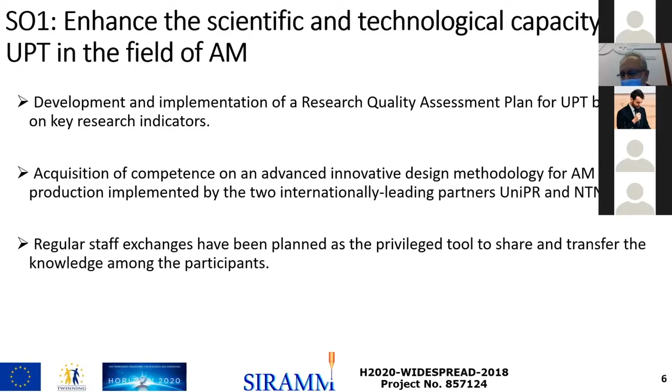We have to do some regular staff exchanges. I will show you a map of the exchanges. Unfortunately, we were not able to do it because of the pandemic crisis, but we hope to start this year to have all these activities done.

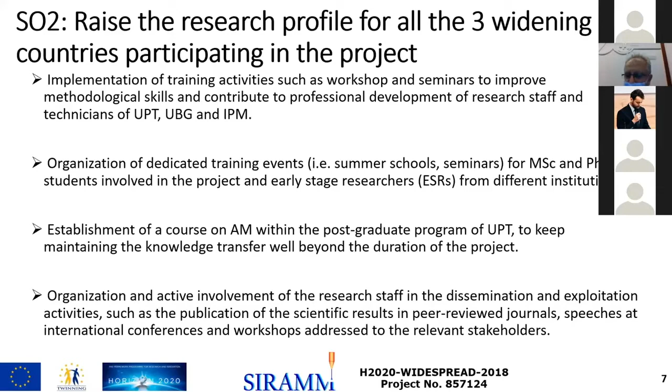What we also plan is to establish a course in additive manufacturing for our postgraduate students. This was planned for the last year of the project. However, because last year we had the accreditation of our master program, we inserted this in order to be advised by our quality assurance. And this course starts earlier, from this semester, and will continue in the following years. A similar approach will be applied at the University of Belgrade. So they plan to introduce an additive manufacturing course to postgraduate students.

So we want to spread the acquired knowledge among different stakeholders. We invited in the project, and we have had the support since we applied for the project, of the Continental company from Romania. We have also the Vitesco company with us. We will have a presentation in the afternoon from the company part, the industry part of the stakeholders. We have also different communication and dissemination activities to be done. We have a Facebook page, a Twitter page, a LinkedIn account and a ResearchGate account.

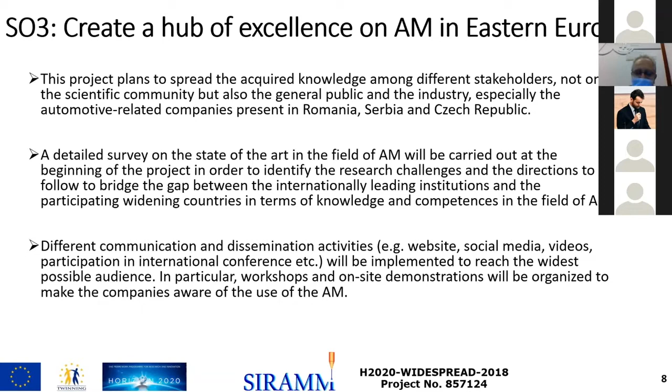So anyway, for such a project, we need to start from some scientific ideas, and we start from the fact that additive manufacturing technology is very attractive nowadays, and many industries try to use it in order to speed up their production process. The advantage is that you can obtain very complex shapes and parts with quite high precision and characteristics. The good thing is that you can apply this technique with different manufacturing technologies. You can apply it for polymers, and the most used is PLA, polylactic acid, but also ABS, polyamide, and additive manufacturing is also used for metals, steels, titanium alloys, and also for ceramics like alumina and zirconia.

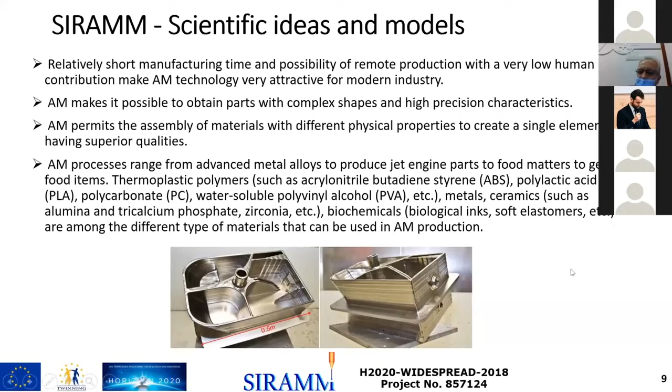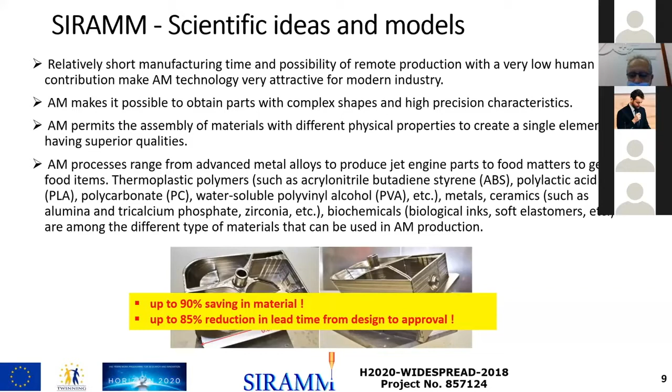So the advantage is that you have a broad range of materials which can be used in additive manufacturing, and you can print very complex shapes. You have 90% saving of material compared with the classical manufacturing technologies, and a reduction of the lead time from design to approval by 85%.

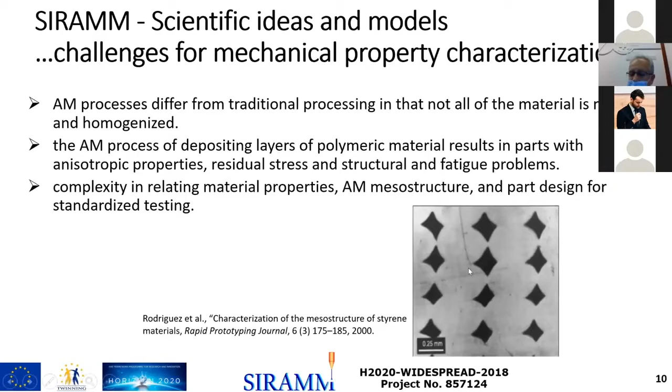However, there are some challenges because the additive manufacturing process differs from traditional processing. Not all the material in additive manufacturing is melted and homogenized at the same time. So we have layer by layer deposition, and this can produce anisotropic properties of the components that are obtained, also residual stresses and some structural and fatigue problems. So our project addresses this, the integrity and reliability of such materials. Also we have a non-homogeneous and incomplete infill. Even if we use 100% infill, you can obtain a shape which is not completely filled.

So some drawbacks of these techniques: low surface quality of additive manufacturing, basically in polymeric materials, but also for metallic parts, quite high porosity, quite high scatter in results if you try to test them or to measure the dimensions of the obtained parts, dispersion of data, variability of lifetimes. In some cases, the durability or the fatigue strength of the components obtained by additive manufacturing is very low compared with the other techniques, up to 10–20%.

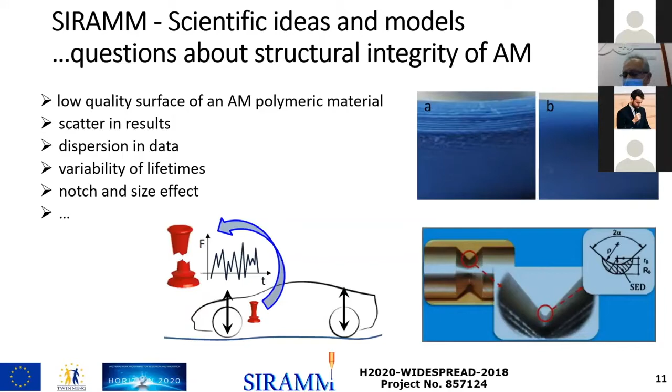And also what we want to address is the notch and size effect on these additive manufacturing components. And here we will have a transfer of knowledge from Norway, where Professor Berto is one of the world experts in notch and size effect, using different approaches like strain energy density, and probably he will show us these approaches Thursday morning.

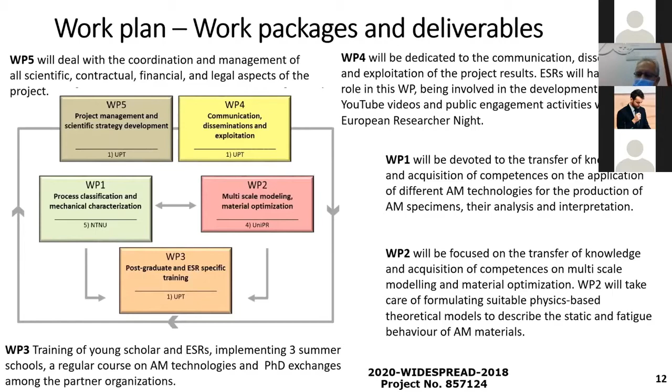So for this project we have 5 work packages. The first one, coordinated by NTNU in Trondheim, is process classification and mechanical characterization. We have the modeling part, multi-scale modeling and material optimization, the work package coordinated by the University of Parma. And the others, which are postgraduate and early stage researcher specific training, communication, dissemination and exploitation, and project management and scientific strategy development, are coordinated by University Politehnica, by the coordinator of the project.

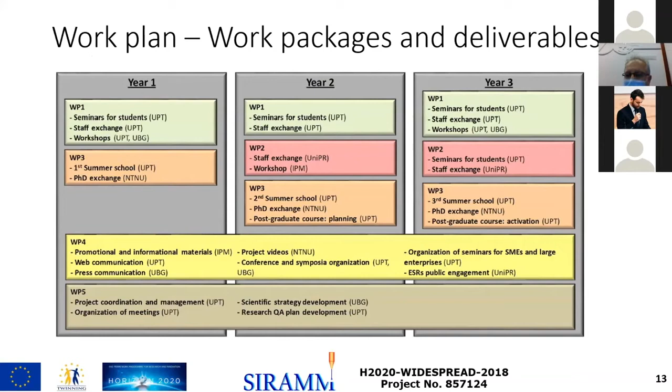So each year we plan different activities. We have seminars for students, staff exchange, workshops, this first one, which is a winter school now, PhD exchange, and these are split across different work packages.

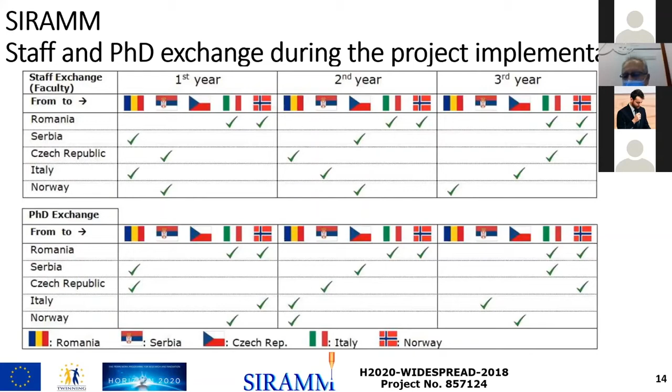So you can see here a map of the staff exchange from Romania. Each year we need to have 2 researchers going to our Western partners. From each country we define mobility for the staff exchange, and also for PhD exchange. We have 2 PhDs to have stages of at least 3 months in Italy and Norway in each of the 3 years of the project. We need to organize seminars with students and seminars for companies.

This winter school, the next one will be in Czech Republic, and the last one in the 3rd year will be in Serbia. We'll have workshops, and I will invite you to join these workshops. The first workshop will be at the end of February, organized by us, probably in the same way, in a hybrid manner. We will have in the 2nd year an East European conference on additive manufacturing, and at the end of the project, we need to organize here in Timisoara an international conference.

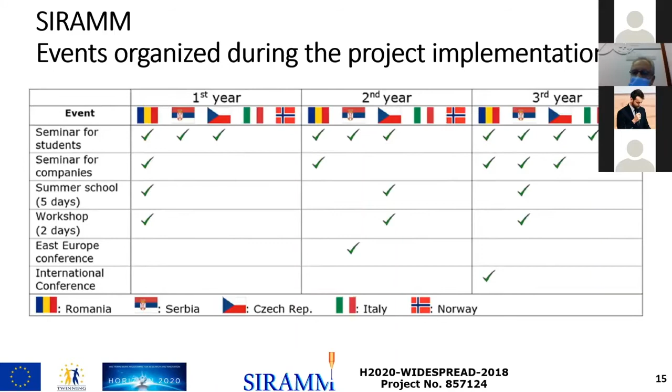So these are the mobility actions. We also budgeted in the project participation on 3 conferences, 2 staff from East European partners, from UPT, from Belgrade and IPM, and 3, 1 per year, 1 staff from our West partners from Parma and NTNU. We need to publish some open access publications. We have budgeted this, and I told you already about this master students course, which starts this semester, theory and application of additive manufacturing materials.

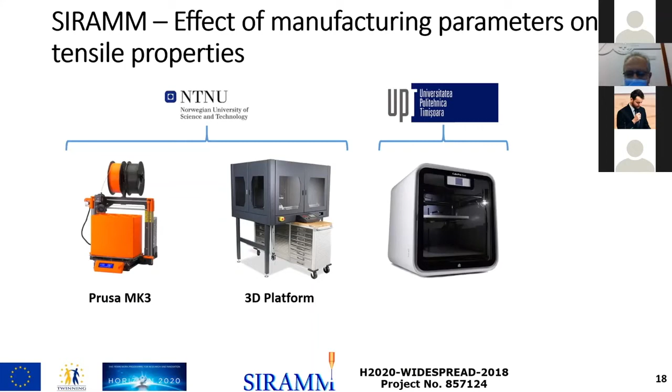I want to go a little bit to see the scientific part that we already did. So we look at the effect of manufacturing parameters on tensile and on fracture toughness properties of polymeric materials. I will show you only some brief results, but probably more results we will present at the workshop. So we use different printers from our university, and some specimens were manufactured in Trondheim when one of my master students was there.

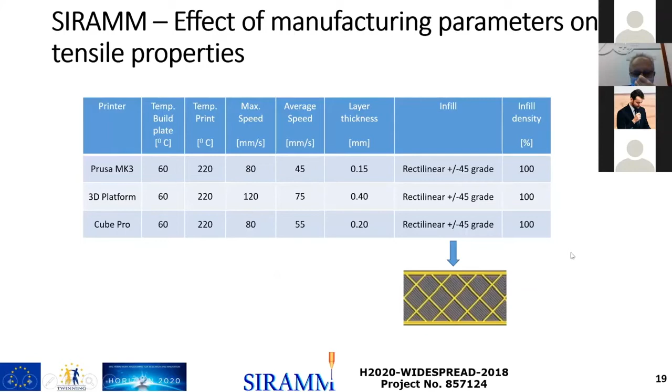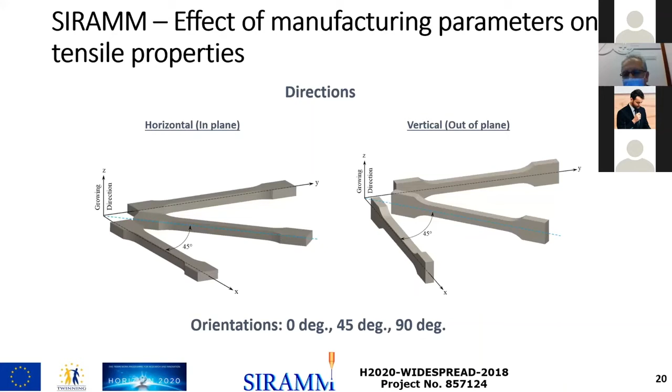We use 100% infill and rectilinear plus minus 45 degrees infill with 100% density with different layer thicknesses from 0.15 millimeters to 0.4 millimeters. We printed the specimens in two planes, horizontal and vertical, and we consider three different specimen orientations.

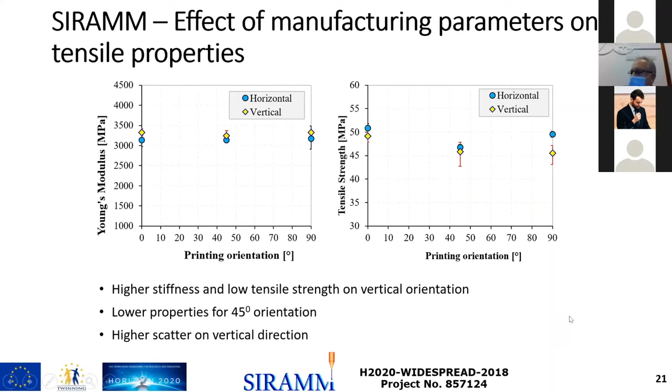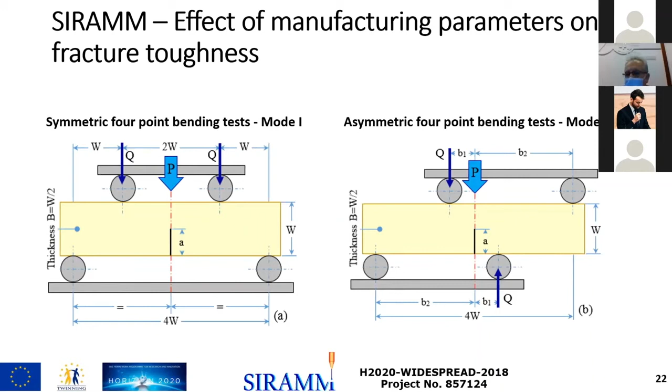For the fracture toughness test, we determine mode 1 and mode 2 fracture toughness using single edge notch bend specimens loaded symmetrically in 4-point bending for mode 1 and asymmetric 4-point bending for mode 2. Also, we look at the specimen orientation. You can see here the specimens coming from the printer and the fracture toughness values. All the mode 1 fracture toughness values are higher than the mode 2.

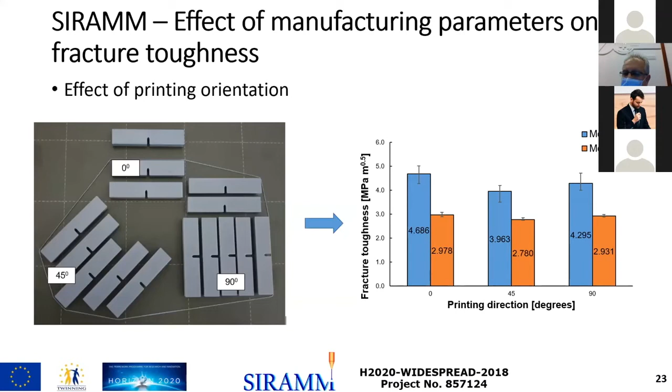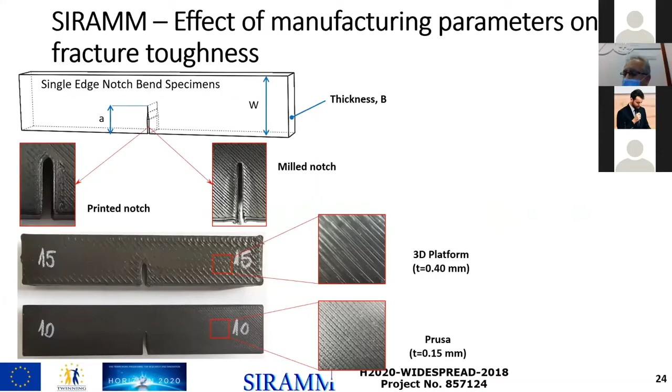As numbers, for mode 2 fracture toughness, we have 2.78, the lower fracture toughness obtained for the 45-degree direction, and the higher fracture toughness for mode 1 is 4.68, obtained for 0-degree orientation. We also want to see what happens if we manufacture the notch or we cut the notch by milling. And the results are here also for the two printers.

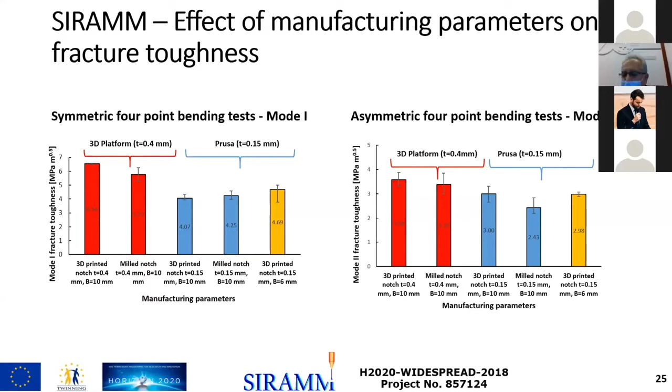So higher fracture toughness values, and the highest fracture toughness value was 6.5 megapascal square root meter. They were obtained from 3D platform with a layer thickness of 0.4, and lower values were obtained on the Prusa printer, around 4 megapascal square root meter. Also for mode 2, the values are lower, around 3.58 is the highest mode 2 fracture toughness, obtained also from the 3D platform printer. And all the fracture toughness results with directly 3D printed notch have higher values compared with those where the notches were machined.

Because I need to finish, we also published some papers. All the papers are on the website of the project I mentioned. All are open access. We have already 5 journal papers, with 2 review papers on additive manufacturing, and we have 3 conference papers. You can find all these results. We also organized some special sessions during conferences, during the Mediterranean Fracture Mechanics Conference in Athens last year. And at the first virtual European conference on fracture, we have, together with TC15, a special session dedicated to additive manufacturing.

What will be next? So we have the workshop. The workshop will be 25-26 February, organized also hybrid. We extended the registration and submission of abstracts up to 15 February. The participation, the same as in this winter school, is free. We plan to have the preliminary program just before the start, on 23 February, and the submission of final papers for Material Design and Processing Communications. It's an open access journal published by Wiley. It's a new journal, and the editor-in-chief is Professor Berto. Normally after the normal reviewing process.